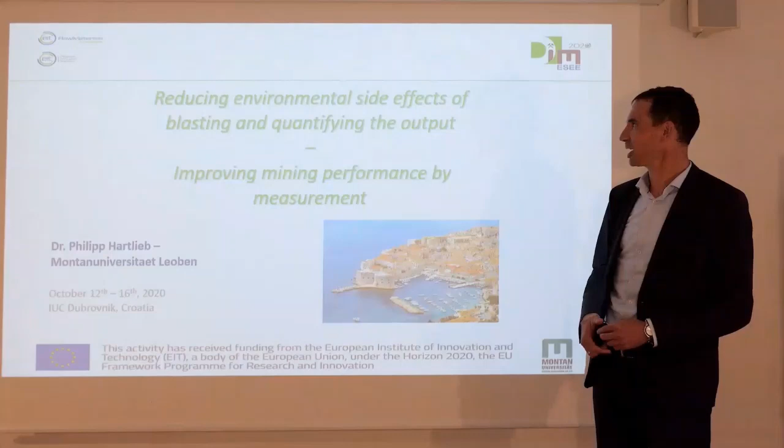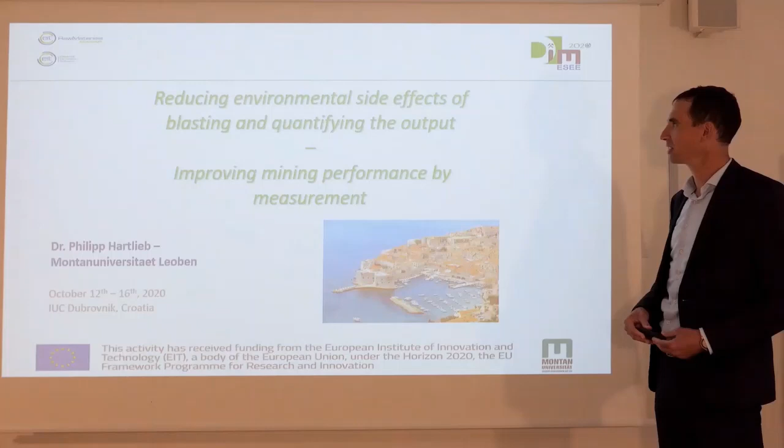I will record approximately one hour now for my talk, entitled Reducing Environmental Side Effects of Blasting and Quantifying the Output, Improving Mining Performance by Measurement. So measurement is very important here. I will record this talk for about an hour, and then afterwards there will be time for a question and answer session, hopefully live through the online portal and stream.

First of all, I want to start with this statement by Lord Kelvin. He said, when you can measure what you're speaking about and express it in numbers, you know something about it. But when you cannot measure it, when you cannot express it in numbers, your knowledge is of a meager and unsatisfactory kind. That's the reason why we want to measure things. We want to know things about the process, we want to know what's going on, and we want to put this in numbers, not just say, okay, my belly told me that. It should be the other way around. So we want to know what we're talking about.

First of all, a couple of words about myself. My name is Philipp Hartlieb. I'm a senior scientist at the chair of mining engineering at Montanuniversität Leoben in Austria. My major research areas are all about rock fragmentation, so drilling and blasting, but also mechanical rock fragmentation, alternative rock fragmentation methods, a bit of digitalization in mining, which is a mixture of the talk today, digitalization and blasting, and some other things as well.

So that's me, but let's go into the topic quite quickly. What I'm going to present you, a couple of things. First of all, the definition of key parameters, because when we measure something, we want to know which parameters we measure, and what these parameters mean for our later life or our later assessment.

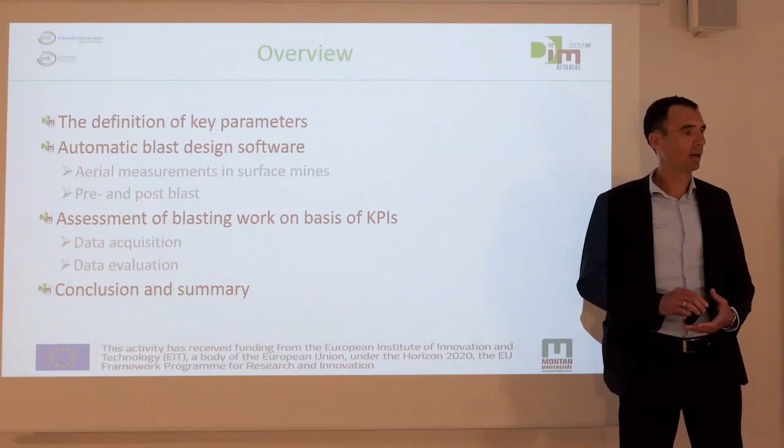Then I will detail two very important things. Number one, the automatic blast design software. Based on the measurements, based on the data that we have, how can we improve a blast, and what is an improved blast, first of all. Secondly, also the assessment of blasting work on the basis of KPIs. So the key parameters, as I said, we want to measure them, we want to analyze them, and derive our conclusions in the end. So that will be the last point of this presentation.

I will rely or set up most of the presentation on a specific use case. This use case was recorded on the Erzberg mine, which is the largest hard rock open pit in Central Europe. It's very close to Leoben in Austria. What we did there, it's an open pit mine, it's a long history. And three subsequent points are most important.

So it's situated close to the city center. You see the city center is here in the lower area. It's in the middle of the Austrian Alps. You see the very nice panorama here. And due to the city center and some other facilities and touristic facilities in the vicinity of the mine, it's close to neighbors. And you can imagine whenever you have a mining operation close to neighbors, close to tourist attractions, there are some conflicts in terms of noise, vibrations, whatever you can think of.

And that's what we want to improve and make better in the future. So as I said, number one, we have to define our key parameters. So what do we want to investigate? Which kind of data do we want to measure? From which kind of data do we want to derive our conclusions?

So the key parameters that we are talking about is, of course, the first thing is you can talk about them before blasting. So that's the blast planning, that's the geometry, the drilling accuracy. Then we have parameters of the explosives, so which type of explosive, which density, which detonation velocity, and the geological influence, of course, is also very important. So how many faults are there? How are the structures that are in the rock?

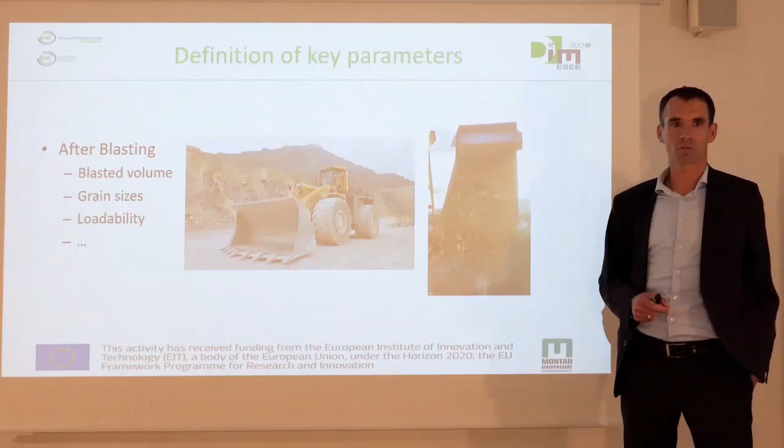So these are a short summary of all the parameters that we want to measure and that we can measure. And now we go a bit into detail about how we can influence the blasting site based on these parameters and based on the input parameters. So I will talk a bit about the blast design and a bit about the blast analysis, the direct blast analysis and not the analysis of the mine. This will be subsequent, the second part of this presentation.

So we will talk about the placement of boreholes, hopefully automatic. And also the characterization of the rock mass, automatic, and of course the characterization of the rock mass will influence the placement of the boreholes. Because if you know how the rock mass is structured, you have more information of how to place your borehole. And then of course you want to know about the muck pile, how does it look like, what's the grain size distribution, and that's also something that the software can do quite good for you.

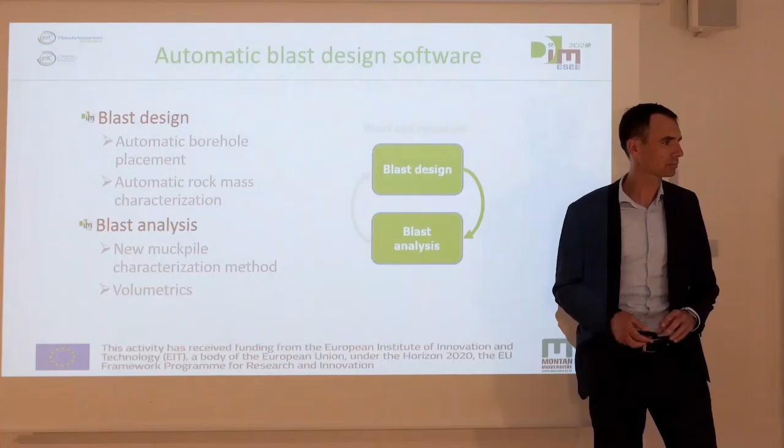Number one, and I hope you can see this little drone flying up in the air. We have a drone, for example. This UAV takes pictures, that's what you see on this right-hand side. And it takes the pictures for a certain purpose, because you want to generate a 3D model from your blast site. You want to know how the blast site looks like. That's something that you can see here. You have a 3D image of your blast site, which is nowadays state of the art.

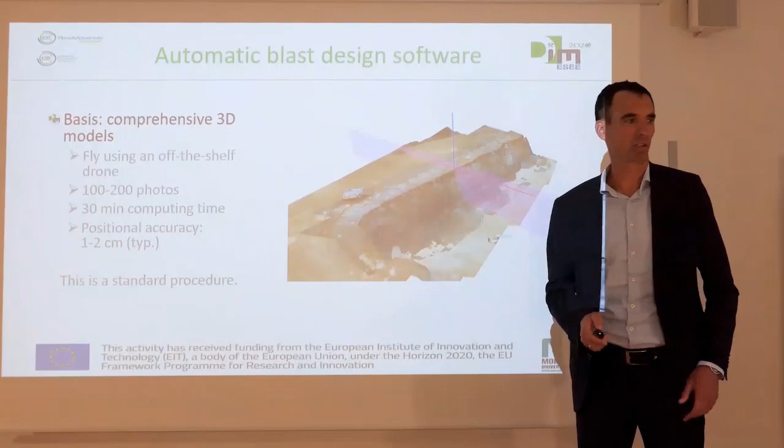But what you can really do with this 3D information is not just having a nice picture of a blast site, it's digging into the detail and really seeing what is behind that. And this picture is a bit of a better resolution, or scroll down of the same picture as before. But what you also have in this picture is you have the position of the drill holes, which are associated to that blast site.

So for every drill hole, you know, I hope you can see this with the camera, you have the red line here, which is the actual position of the drill hole, and you have the black line here, which is the actual face of your bench. And for every drill hole, you know how far is the bench spaced from the drill hole, so how much burden do you have at which specific part of your face. And you can see this down on this picture that there's a color coding there.

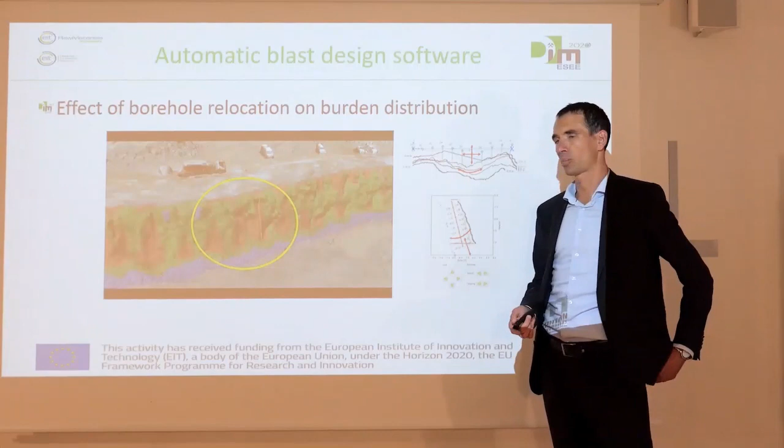Areas, blue areas, green areas, red areas. And with this color coding, you can very easily see where is the burden too high, where is it too low, where is the burden in a complicated or not so good situation. And then, of course, you can react with the drill planning or with the blast planning on that. You can react saying, okay, I need more explosives, I need less explosives, I need probably different types of explosives, or I need to take special precautions and special care for this blast.

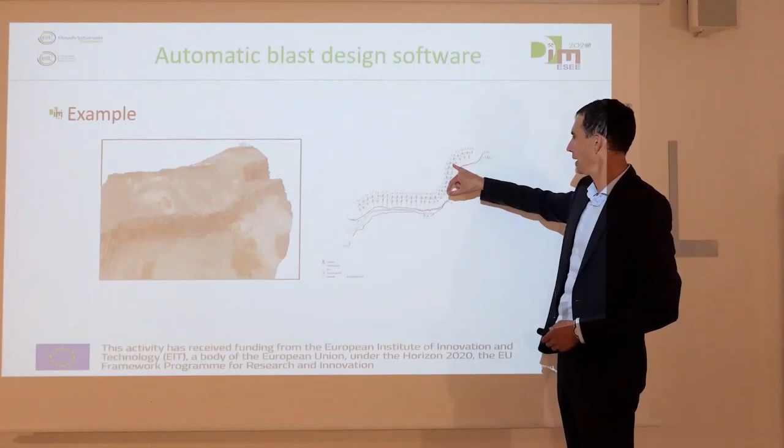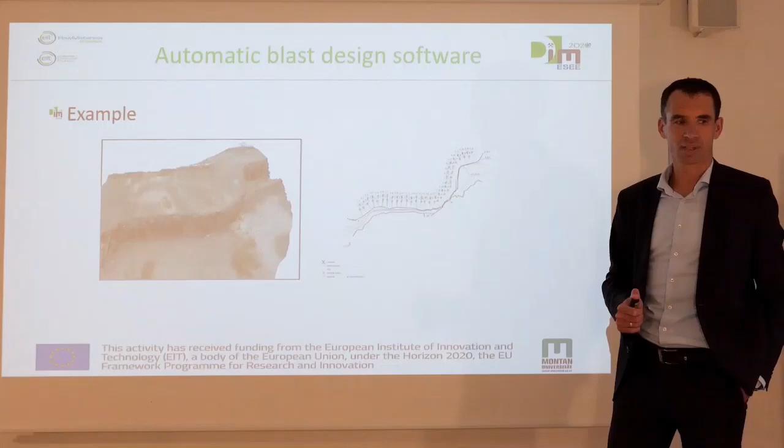As an example, the blast design software could also place your blasts, or the drill holes, in the optimum way for optimum burden and spacing, so you avoid pitfalls in the geometrical situation. As you might know, if you have too little burden and too many explosives, everything will be thrown away. If you have too high burden and too little explosive, you'll just generate vibrations and nothing else. The best solution is somewhere in between, so you want to make sure everything is done in the best feasible way.

Well, this is the example. You can see that this is all blue and green, which is a good way forward.

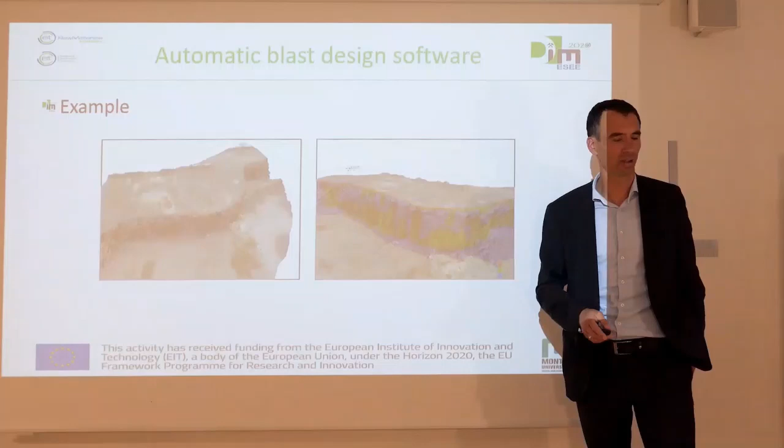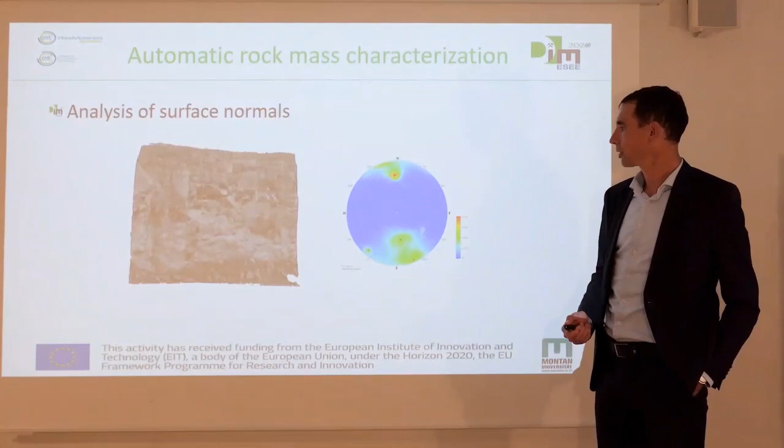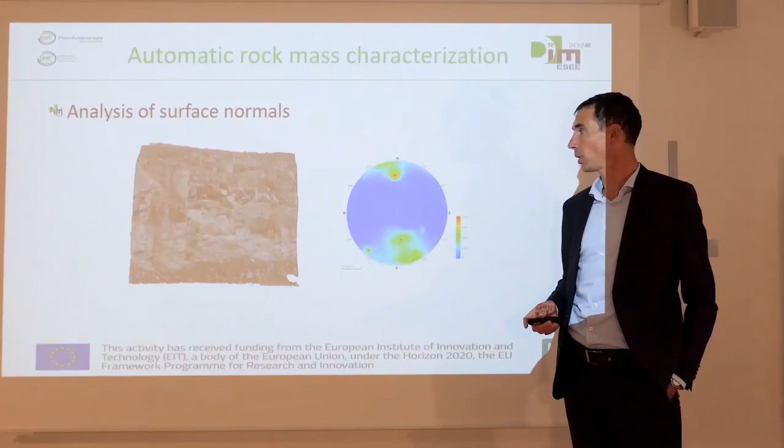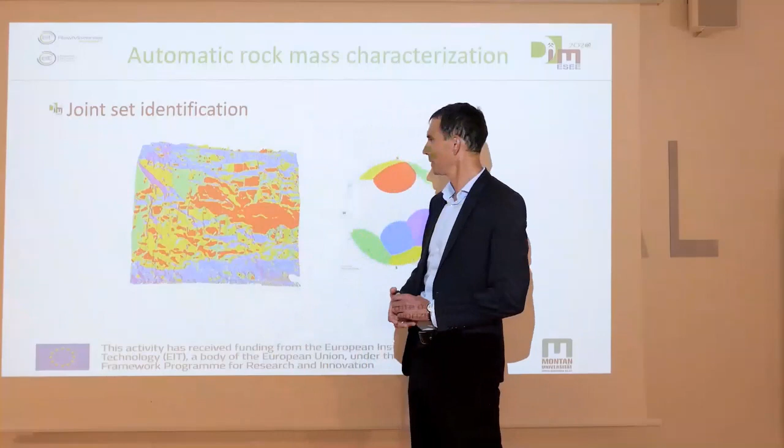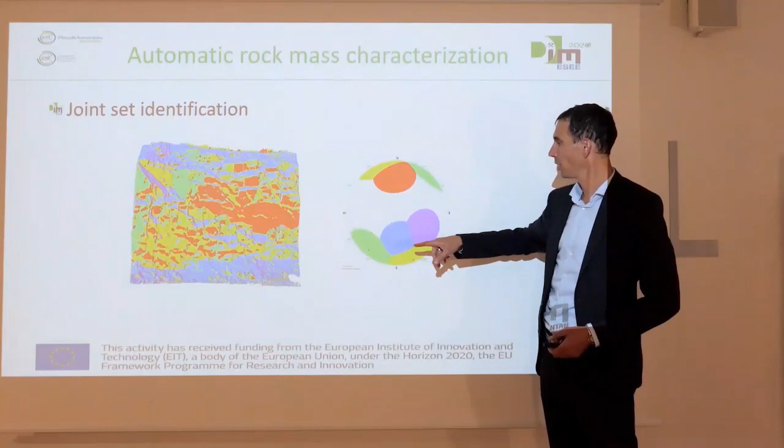This is the same picture but with different coding. You can identify a certain range of joint sets—the red ones, yellow ones, green ones, blue ones—represented here on this slide. You see the orientation of the red, blue, pink, green, and yellow joint sets. With that, you can improve your understanding of the situation and your planning capacity.

Now imagine a geologist having to go to this blast site every time you do blasting and do all the mapping, which is a huge effort. Software and automation like this can help your geologist understand the situation and map it quickly and reliably for your operation, so you can change on a daily basis. The mine we've been testing this at blasts every day, so you can't take a lot of time for planning.

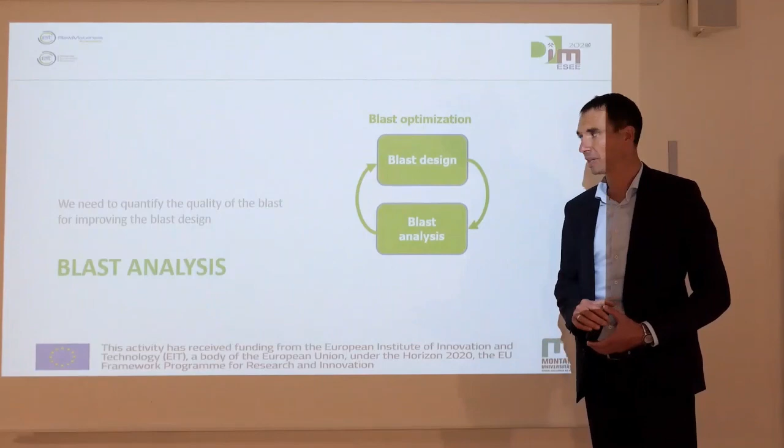So now we did the blast design, we blasted, we know what happens. The second part is the blast analysis. We want to know the outcome of the blast, what did we do to the rock, and is it good for us? Here too you can see a picture that hopefully changes over time.

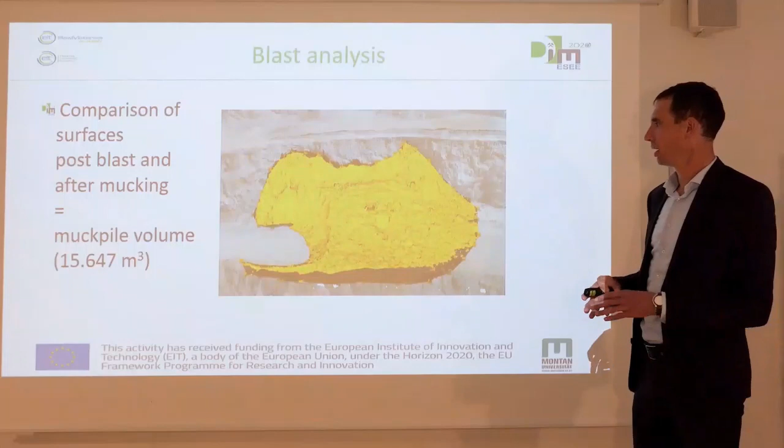You can compare how the situation looks before the blast, after the blast, and after mucking away the rock pile. In this example, you can see the yellow part—this is the volume that you actually extracted. In this case, it's roughly 16,000 cubic meters.

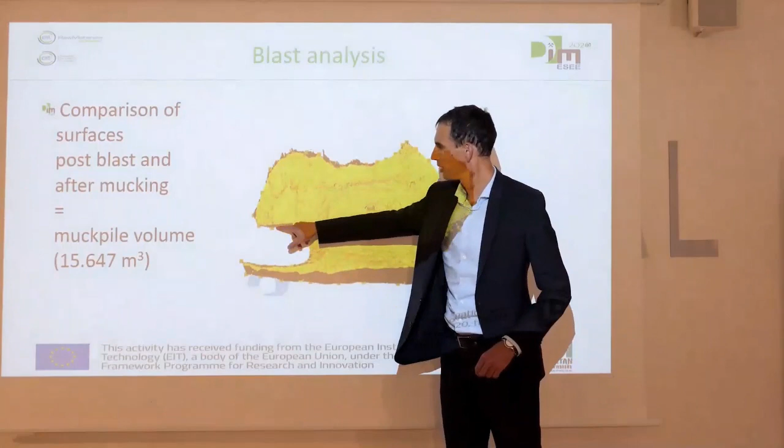There's one thing where automation can't help you, very apparent in this picture—this moon-shaped part, because the guy taking the picture was slower than the wheel loader driver. So the picture was taken after the wheel loader driver had already excavated the first couple of shovels. The result won't be entirely true here, but it's a good step in the right direction.

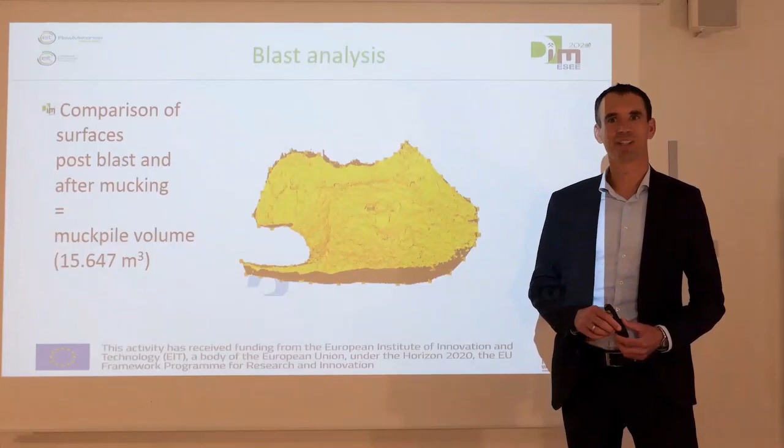So, the best technology doesn't work if you don't coordinate your approach or your operation properly. Take care of that.

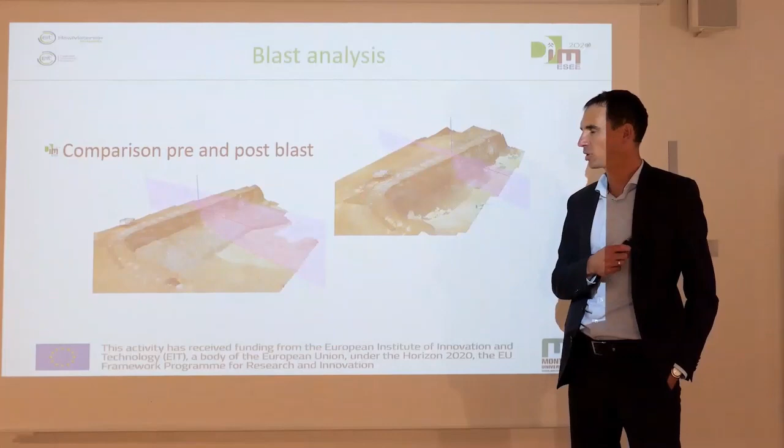What you can also do—you've seen a similar picture a couple of slides ago—is compare the pre and post blast. You can see where the muck pile is, how it looks, how the shape looks, and this helps you understand the future and plan ahead. So you understand the past, and you know what you have to change for the next blast and future operations.

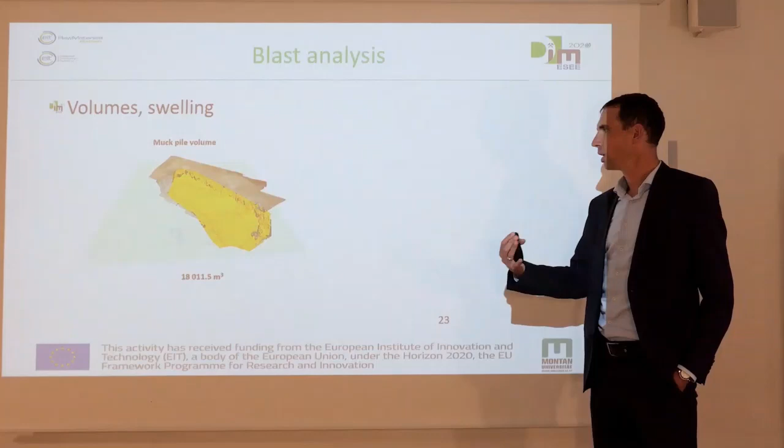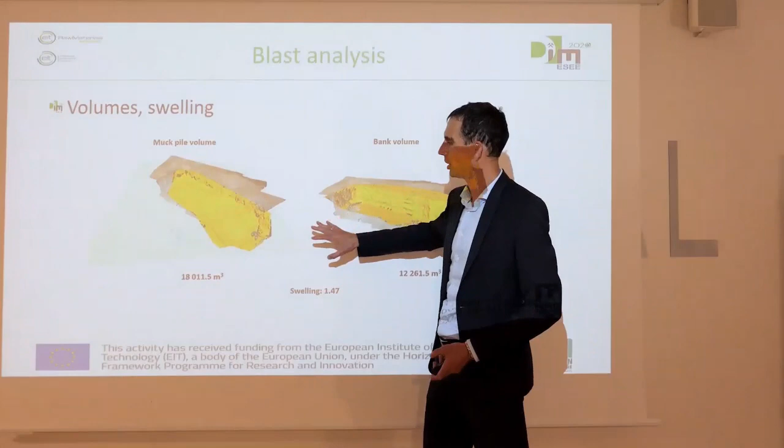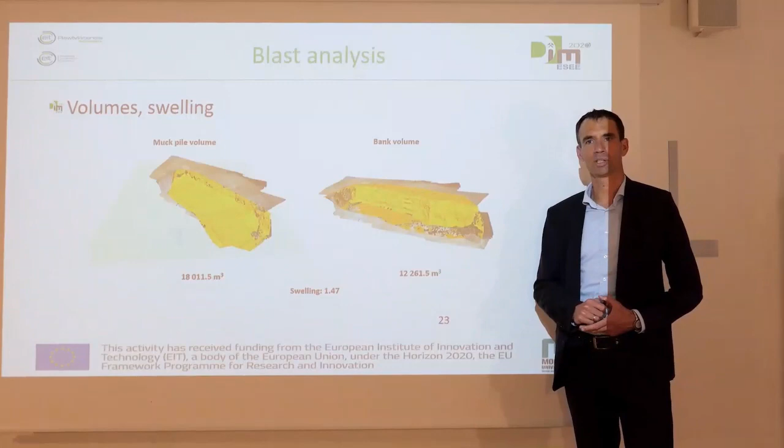Something else would be the swelling of the muck pile. You can analyze how the volume was before blasting, the bank volume—the solid volume before blasting—versus the muck pile after blasting. This would be about 12,000 cubic meters before, and 18,000 cubic meters after, so the swelling factor would be roughly 1.5. You have 1.5 times more volume than previously, simply due to fragmentation and swelling of the material. Very easily done with automated software.

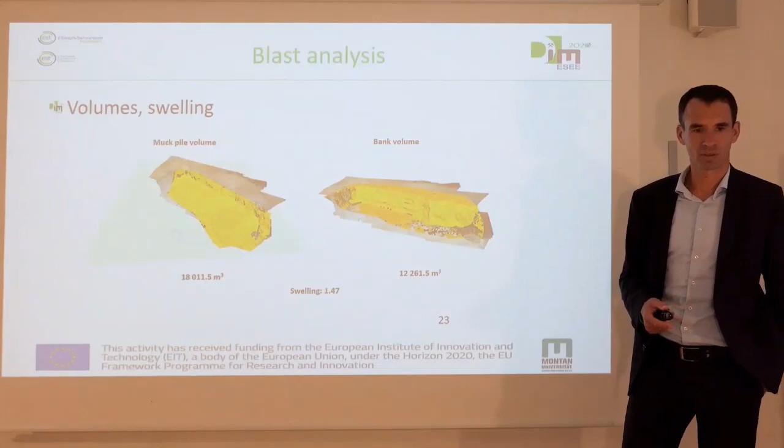You would not be able to do this with any other method.

Another way measurement can really help you is understanding the grain size distribution that you produce. Many of you probably had a mineral processing lab, sieving a lot and analyzing grain size distributions. But you can't do that on a muck pile - you'd need all the mining engineering students in the world for a year to sieve this material, and that's not really possible. So you want an automated software.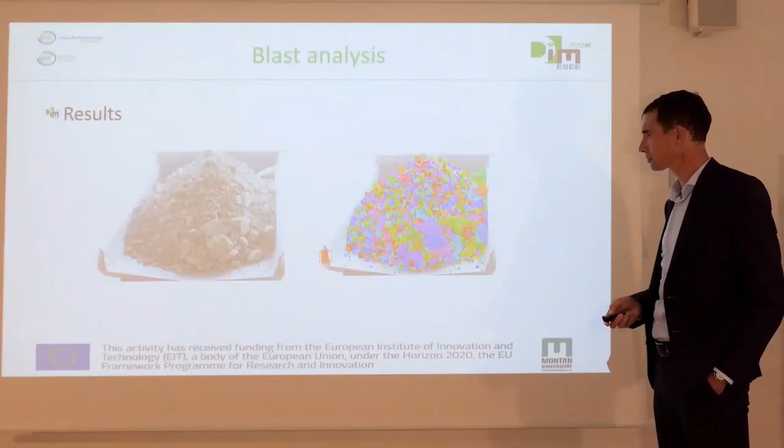That's also what we have to consider in a mining systematic approach - we have to combine bits and pieces, taking care of what actually helps our system and of which parts we don't have to take so much care. Many of you will say this makes the cyclist fast, but it's also the tires, the shape of the wheels, the position, even the structure of the skin suit the guy is wearing, or the special friction-optimized shoes, so they don't oppose resistance to rolling forward.

With that we go into the systems analysis, and I'm going to show you a couple of small pictures now, but I hope you can see them on the video. I focused during the last 25 or so minutes on this part, the blast site, in the mining operation.

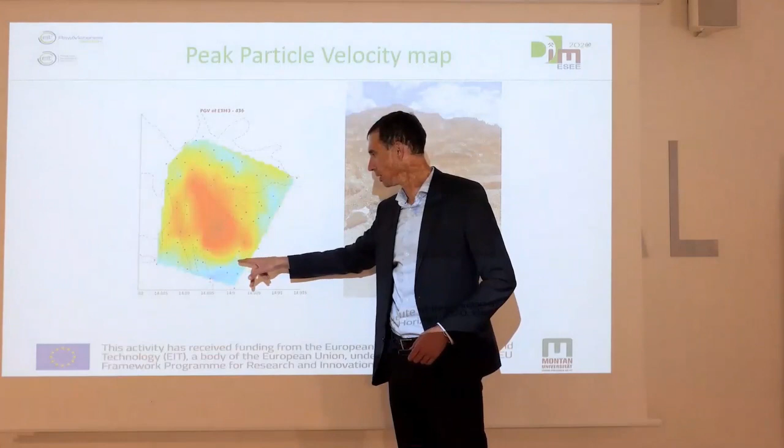So what we did in this campaign, you see a map of the mine, an idealized map of the mine here, and you can see many black spots. All those black spots are positions of geophones. So we have 80 something geophones to observe, I think 35 blasts that we did there. Now we have the data of all those blasts and know how the blasts behave and how the vibrations of these blasts behave. That's the most important, crucial part behind that.

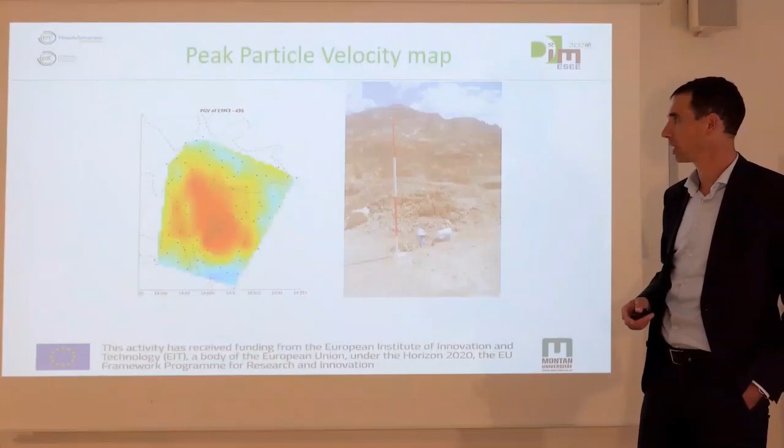Then another very tricky part is, as I said, you want to know something about loading, you want to know something about hauling, crushing, energy consumption, and so on and so forth. And this would be the good old-fashioned way as we did it, until 2 years ago.

We still have a couple of students. We can position them in the mine. We give them a stopwatch and a sheet of paper, and we tell them, now track the operation. But you would have to know that this operation is working 24/7. They have 4, sometimes 5 different wheel loaders in operation simultaneously, and these wheel loaders change position quite regularly. So they don't always muck at the same position because that's a matter of quality control. They want to move to other places and back and forth. So those students would have to run or move around rather quickly, and still you would need plenty of students in order to follow the entire operation, which simply is not possible, and you can only get a glimpse of it, but not everything.

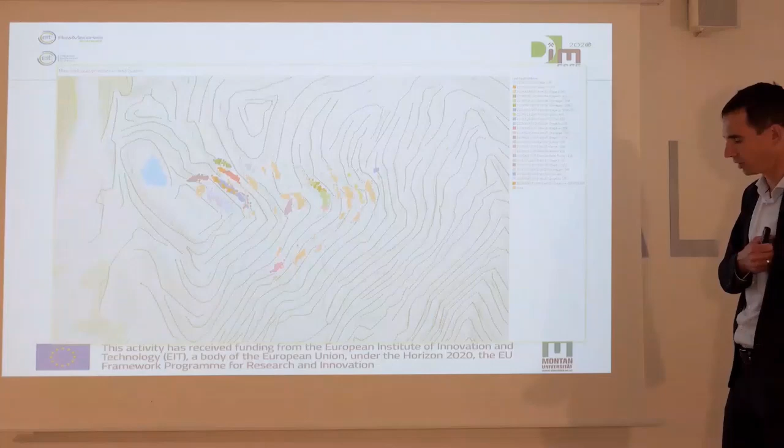But what you can also find out, for example, is that this is a map of the entire mine site, and the spots, for example, show—you can color them in any way that you want.

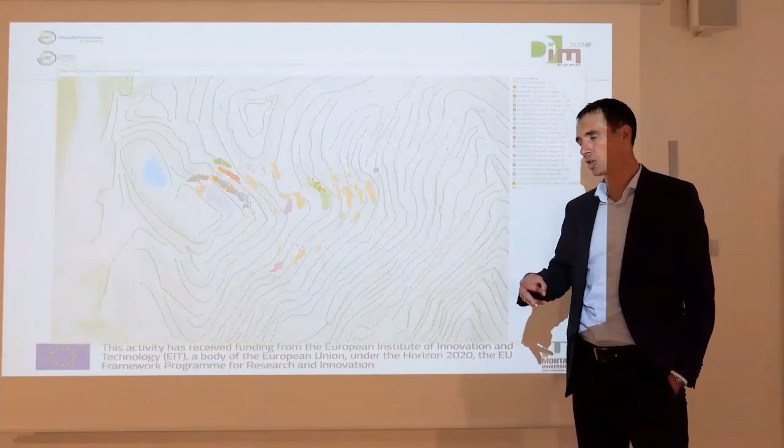These spots could show the energy consumption in the crusher, the digging duration, the type of material, the iron content, or a combination of all of them. Then you can see, in this area most things are colorful, which could indicate a deviation. In this area everything is green or yellow, whatever color coding you have, and you can start to dig into the data, analyze it, and investigate the findings.

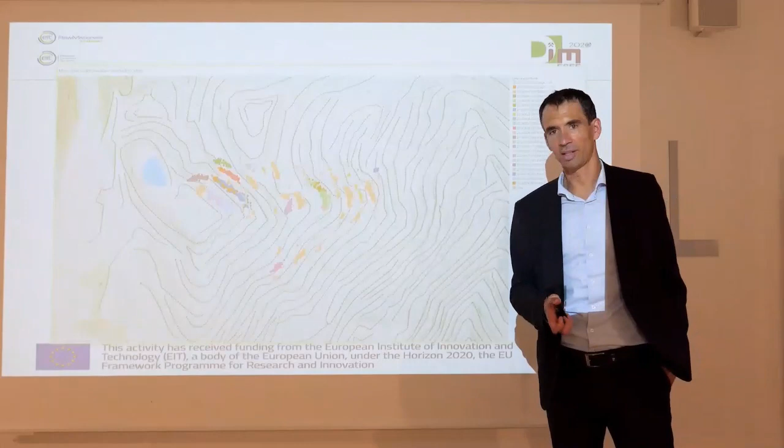By the way, these are roughly 16,000 different truckloads that we analyzed in just a month. So imagine having students there clocking the situation manually. With this automated system, it was much better and much more convenient for us.

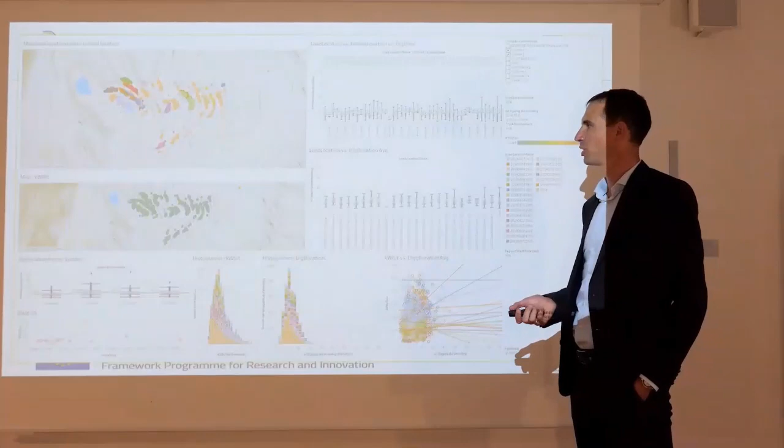So, coming to the end, I would say the most important thing here is the blast design process, and real data and knowledge about the geometry, the geology, the rock mass, and the drilling accuracy really helps you design your blast and really improves it.

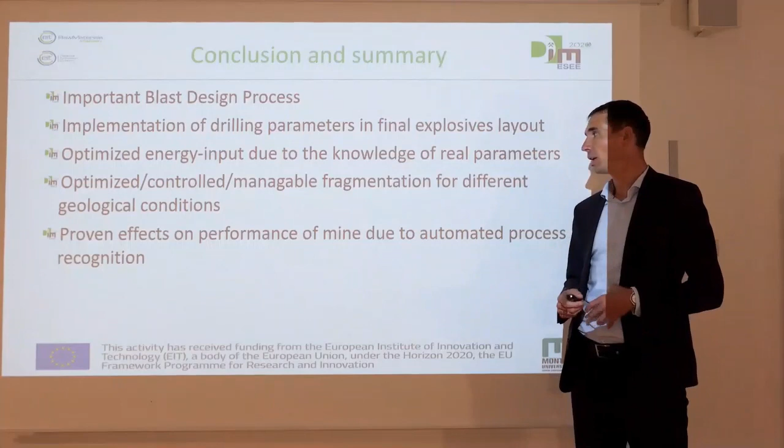Secondly, this design process and knowledge has to be implemented in any explosive layout, in the optimum energy input, in the optimum fragmentation control. You have to know the data to organize that and come up with the best result for your operation. The best result is not the same for all operations.

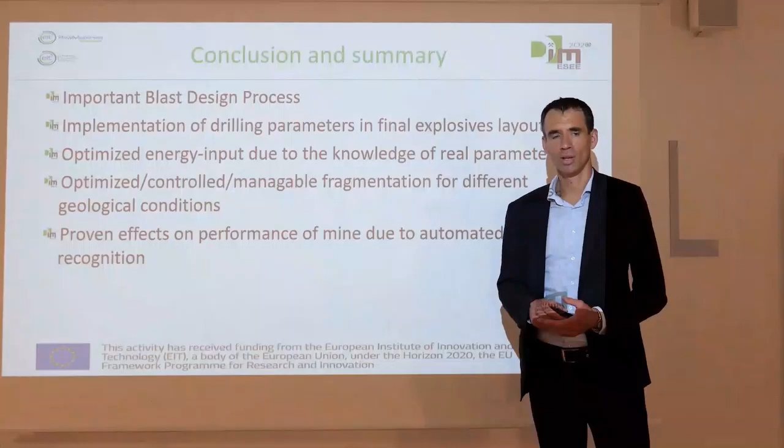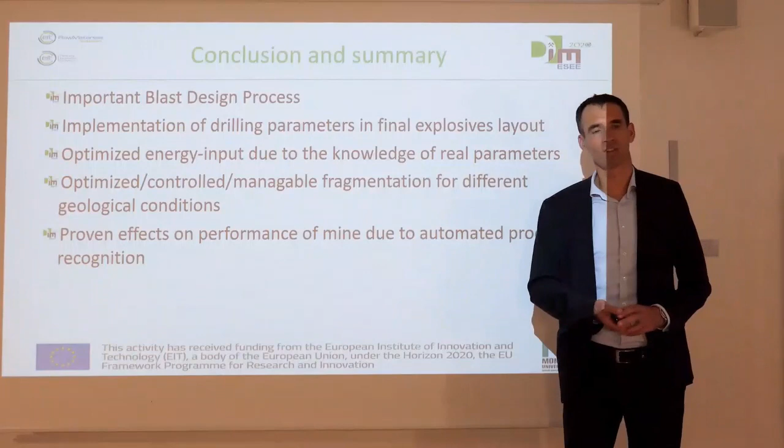Some operations probably want very fine material, some want coarse material. No operation wants vibrations. No operation wants too much noise in the vicinity. So it really depends on the goals of your operation, what you want to achieve, and in which direction you want to move.

But what is really very important here is that with this automated process recognition, we can now really analyze the effects of different blasting setups, the effects of different input parameters, not just blasting. You can change many things in the mine, but with that we can track the input parameters downstream and really know what's happening.